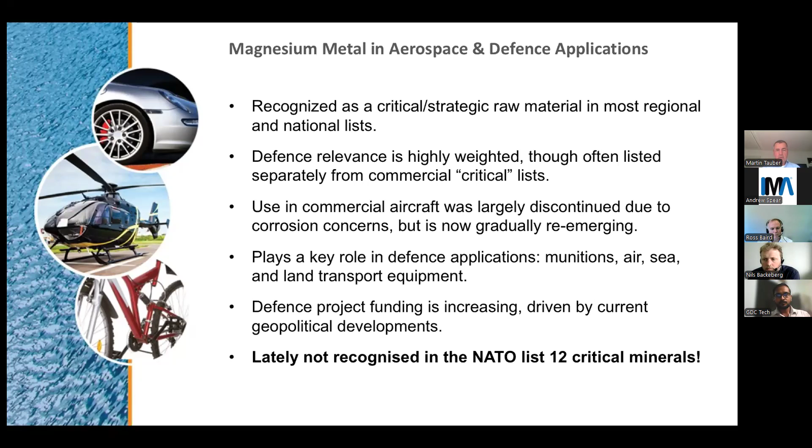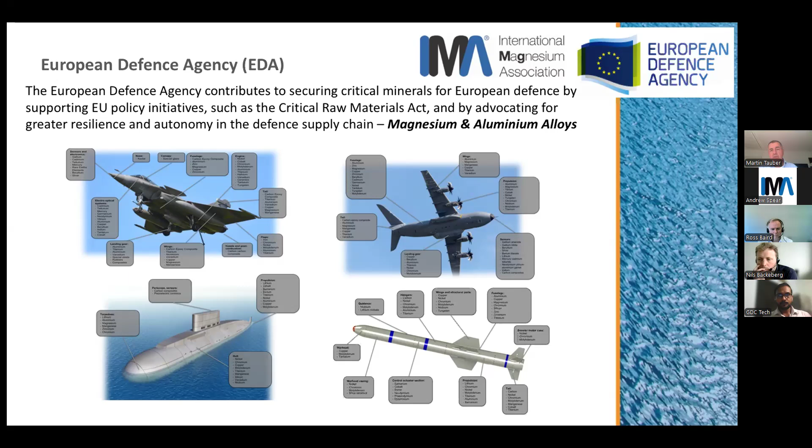Here's some examples, this is from the European Defense Agency report, I think from 2023, in coordination with other European policy initiatives like the Critical Raw Materials Act. As you see with these application examples, it's very hard to see, but I can assure you that magnesium is on all the slides here. And if we talk about magnesium for defense, aluminium alloys are also very heavily used, so it's actually the magnesium and aluminium alloys perspective that's interesting for us.

Some other examples here from an independent company who combines all the different lists and selected a couple of raw materials here. You see in the defense and related applications that magnesium plays a medium role. But interesting, on the right side, possibly also hard to see, is that magnesium, when you look down at the end under defense and other applications, is actually listed in most of the defense applications there. So this confirms it's very heavily used.

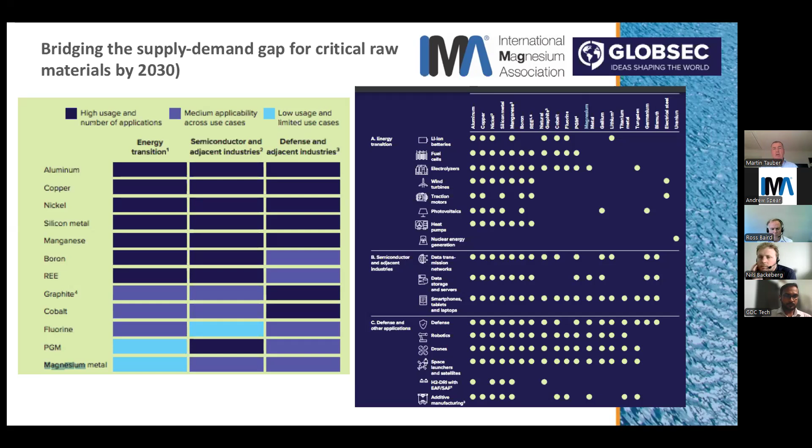An example from the US, I think a recently published list, there are two sides of the lists, one for critical materials for energy and one for critical minerals.

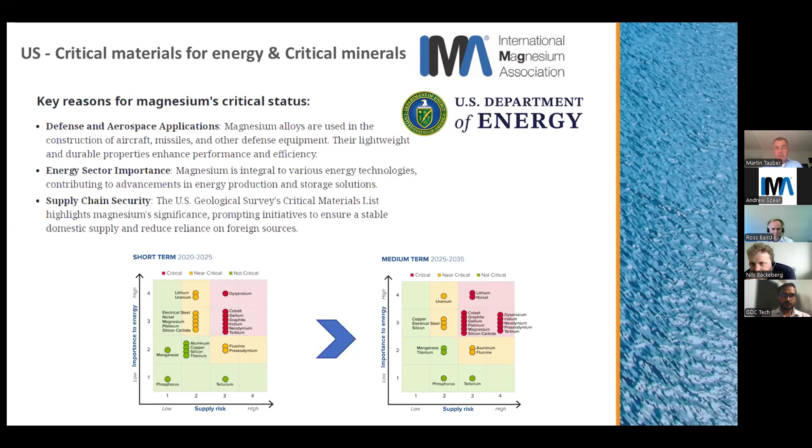The first statement prominently names defense and aerospace applications because of the criticalities involved. At the bottom, you see the different materials in the criticality assessment. In the short term, ending this year, magnesium is marked mid yellow dotted, and in the medium term, the next 10 years, magnesium is listed as red dotted.

That's a critical material. The last one I show is the NATO list, published last year, actually based on studies from the Den Haag Institute. It lists 12 materials critical to military applications. Strangely enough, magnesium is not among these 12 materials, but it's also not on the list of considered materials, which you have on the right side.

So this was very strange to see. I don't know why, but we have asked about that. We've commented on that list on social media as well, without any response so far. We'll continue doing that. We see manganese on that list, and what we've seen in the past is that consultants and policymakers still mix up manganese, magnesium, and magnesite in these critical raw materials assessments.

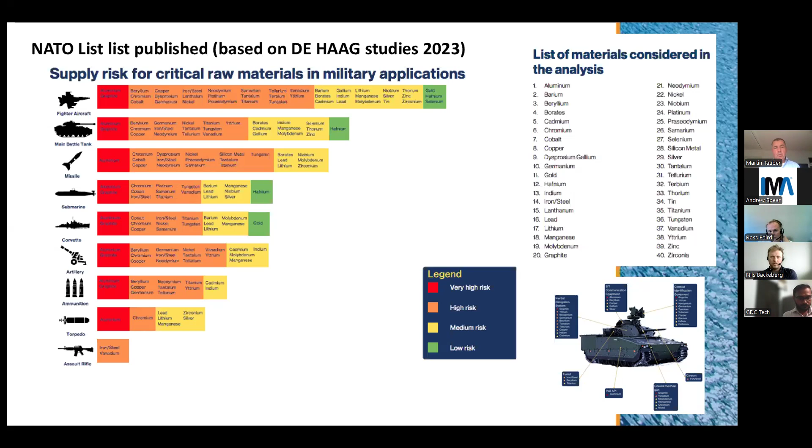So as a closing point, I want to demonstrate what difference it makes whether we are on the list or not. I think IMA's opinion is that we have to encourage our material to be on such lists. This is just an overview of what impact it could have on the market.

NATO, the bloc, has identified 6 areas. First, identify key vulnerabilities to prevent supply disruption risks and declare the material as strategic. Second, strengthen supply chain resilience, with measures including strategic stockpiling, recycling, and substitution.

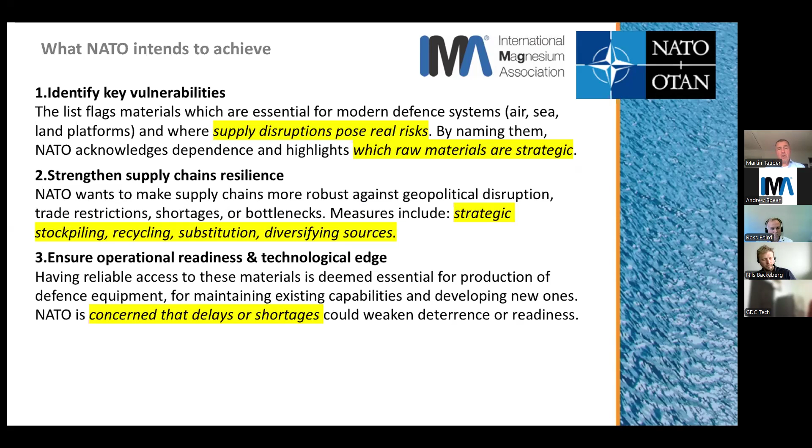I think stockpiling is especially interesting for an industry. Third, ensure operational readiness and technological edge to overcome shortages, which impacts the readiness of the bloc. Fourth, policy cooperation amongst allies, which will span procurement, stockpiling, risk assessment, and possible trade policy.

Fifth, public transparency and signaling, which also mirrors how it will encourage and attract investment into our industry, and guide research, innovation, and substitution. The last one is R&D alternatives, not only into substitution but also into recycling technology. So it's very important to be on such lists, and IMA and its members will encourage and inform policymakers on this as new assessments come up.

So with this input from the policy area, I will hand over to our first speaker, Dr. Nils Backeberg, founder and director of Project Blue. Nils worked before at companies like Roskill and Wood Mackenzie. He has an academic background across 3 different continents: South Africa, Canada, and the UK. He will talk about trends and forecasts in aerospace and defense applications, in particular magnesium.

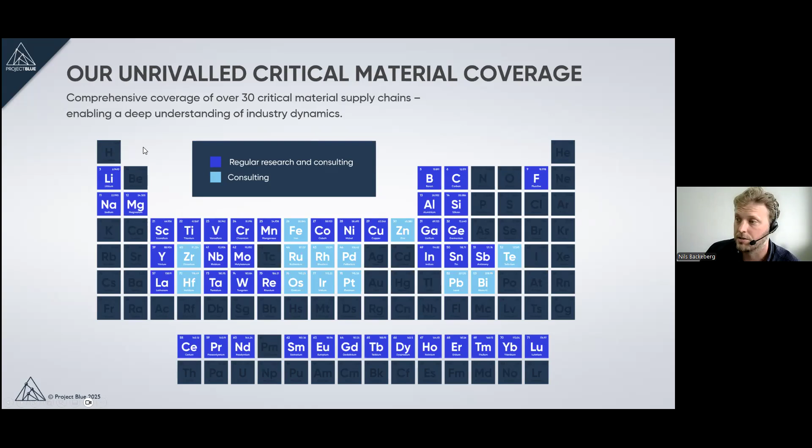As part of that, what we get to do and where we leverage our expertise is identifying cross-cutting themes within the different commodities and their nuances, whether it's lithium-ion batteries or superalloys in general. Because we cover things like titanium and rhenium, where aerospace makes up the large majority of demand, this has led us into building detailed aerospace analysis. So all of our research is underpinned by our own independent research in the different sectors.

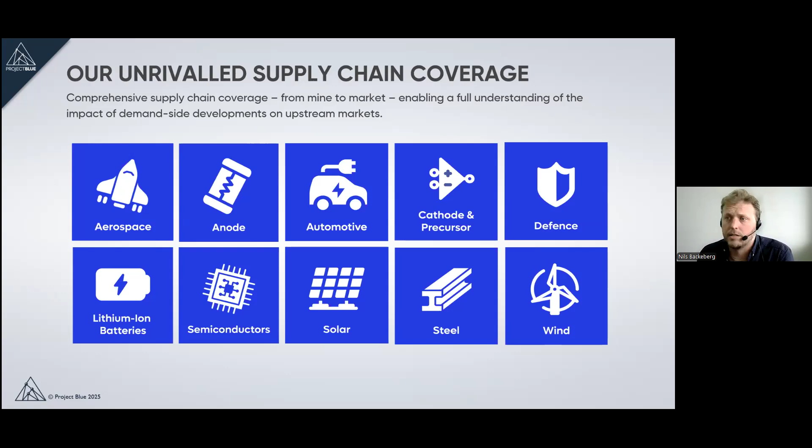We have our views, what underpins the demand drivers, and the supply and demand analysis, price analysis, trade analysis that sits behind each of these commodities.

I won't go into the detail of the magnesium research. My colleagues will be presenting that at the next conference for the association, so hopefully you can get some more information on that.

I'm really going to be focusing in on our aerospace research. There are forward-looking statements, so the usual disclaimer in terms of your due diligence, but I hope you enjoy the narratives that we put together. This is what we do.

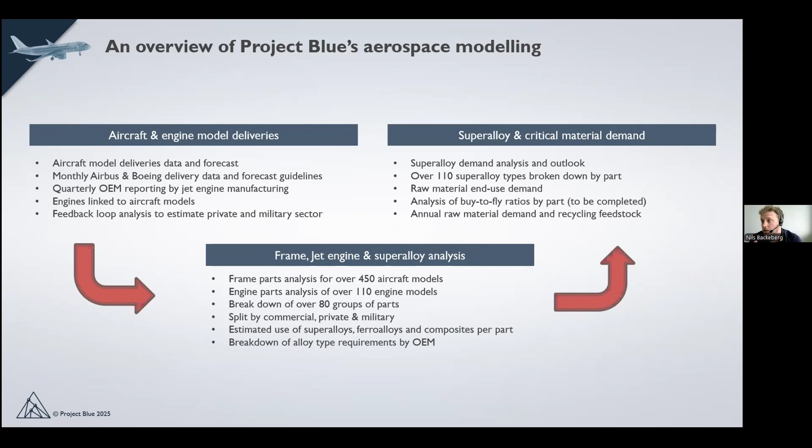So to give you a sense of what we've built, jumping straight in, we've been tracking aircraft deliveries and orders for various commodities. What we've done is forecast out the landscape, specifically post the COVID pandemic and the unfortunate fatal crashes from the Boeing Maxes in 2018, where you saw significant impact to aircraft deliveries, and the demand for these raw materials was impacted.

Trying to understand, when is the aerospace industry recovering? We saw a fast recovery post-COVID, and I'll show you some of the data. But there have been a few things in the pipeline that have impacted the market: disruptions to other supply chains, ongoing issues with certifications, and also the entrance of COMAC out of China. With regards to various supply chains, there are key nuances to dive into.

Now, what we've done in the process, on the bottom side of this slide you're looking at, we've taken over 450 aircraft models and split them out into their different parts and assigned superalloy formulations to the different parts and applications across these aircraft. We've done the same for engine parts for over 110 engines, and broken down the parts into the details, and again we've got all the superalloy analysis in there.

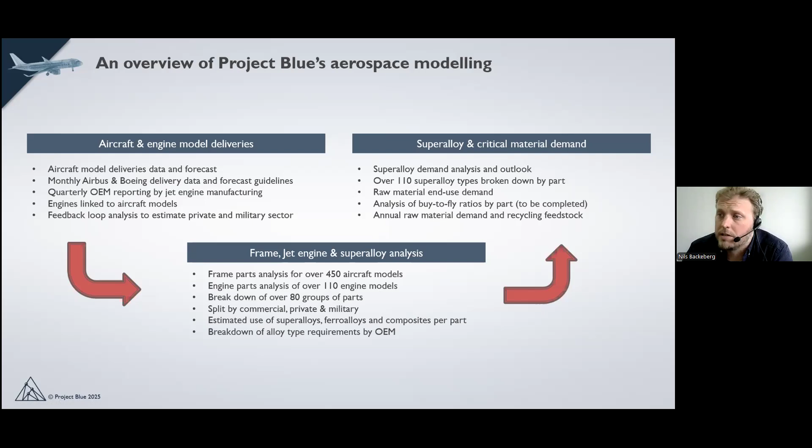And what's quite interesting from the superalloy perspective is the aerospace industry itself accounts for around 50% of the superalloy market. We're busy finishing off industrial gas turbine research, which will give us the next 25% of that market. So we're doing some really niche and nuanced research to understand the superalloys industry, which has been a lot of fun. So I hope you enjoy what we've put together.

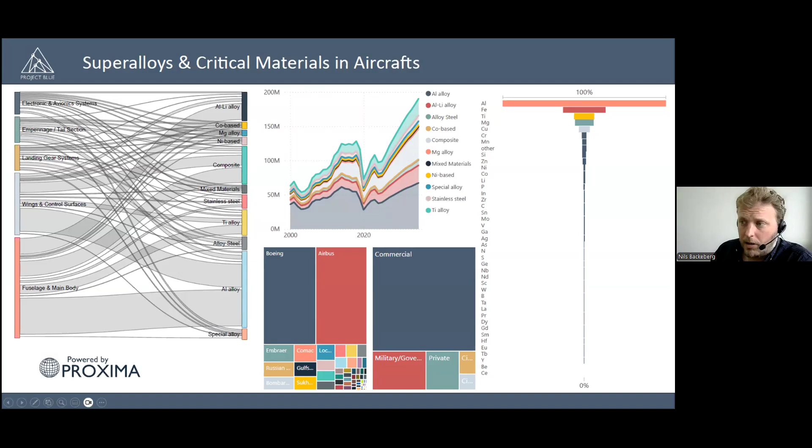So this is effectively the output at the end. This is a snapshot of a Power BI dashboard. I do have it open live here, where you can start to identify, if we look at Boeing, what alloys are they using, Airbus, what alloys are they using, and even Embraer, and try to understand what commodities go into the different parts of the aircraft. It's a live dashboard, so I'm just showing you a snapshot here.

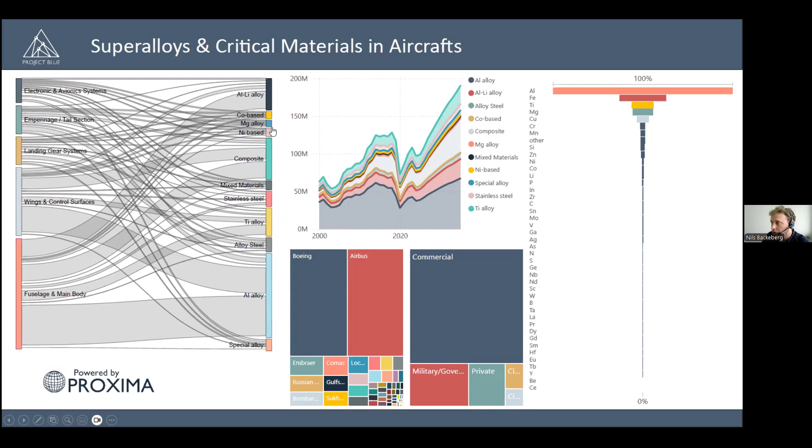And you can see the aluminium alloys. This is looking at frames. Ah, there we go. So this is looking at aircraft frames. You can see aluminium alloy is exceptionally important. This is really where you see titanium alloys, magnesium alloys sitting in here as well — here they are in the small blue at the top. This is in terms of total volumes of the aircraft weight.

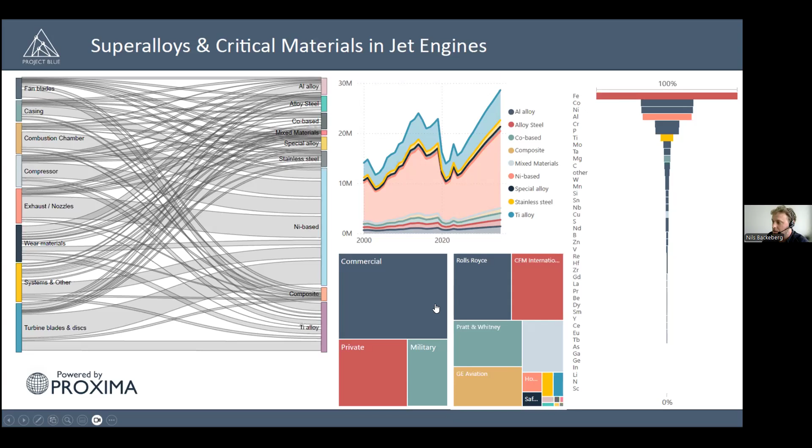Doing the same for engines looks slightly different — lots more centered around nickel-based alloys and special alloys going into the engine and its different parts. And again, breaking this down by Rolls-Royce, Pratt & Whitney, etc., all the key OEMs. You can see how commercial really defines the overall pattern of demand in the aerospace industry, but military for engines makes up a significant portion.

Going back one slide, slightly less on the frame side — that's just the relative proportion of materials used for the frame versus engine when it comes to a fighter jet. On the right-hand side, you can see aluminium is a high volume material, and iron, titanium, magnesium is the fourth largest element used in the alloys in an aircraft frame. So a very, very important metal when it comes to the aerospace industry.

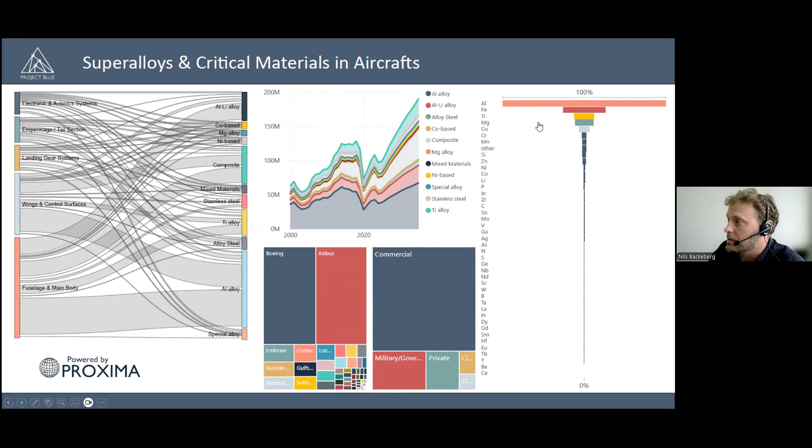For engines, it falls slightly lower, but still in the top 10 of commodities used by volume in engines.

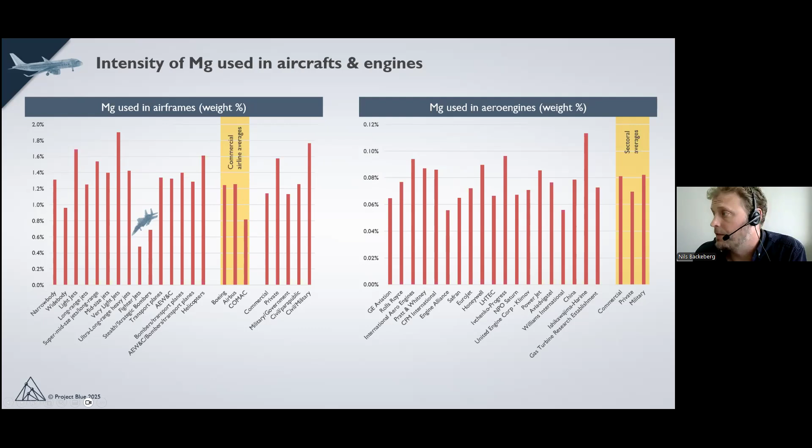I'll come back to that. So we can break this down a little further. I mentioned the disruptions to the aerospace industry post-2018 and into the COVID-19 pandemic year in 2020, with quite a rapid recovery in 2022 and 23, as everyone was eager to travel again. But we've seen real disruption to supply chains over the last 2 years, with the aerospace industry struggling to recover to its delivery rates prior to the pandemic. So there are ongoing issues there.

You can see here where we break this down by the different OEMs—Airbus and Boeing at the bottom, other commercial next. This is really where we see some penetration from COMAC ramping up. Military is shown in yellow, private planes are also significant, and helicopters also play a good role. So what are the parts in the airframes that sit behind this?

Yes, it's the fuselage and main body, wings and control surfaces. Just to note, this is in kilotons of magnesium element or metal, and this is cumulative data from 2015 to 2035. There are a few nuances here in terms of developments in the alloys and so on. But you can see the most prominent use and demand is magnesium used within an aluminium alloy. You can see aluminium lithium alloys coming through, aluminium scandium also used, and then magnesium alloys as well.

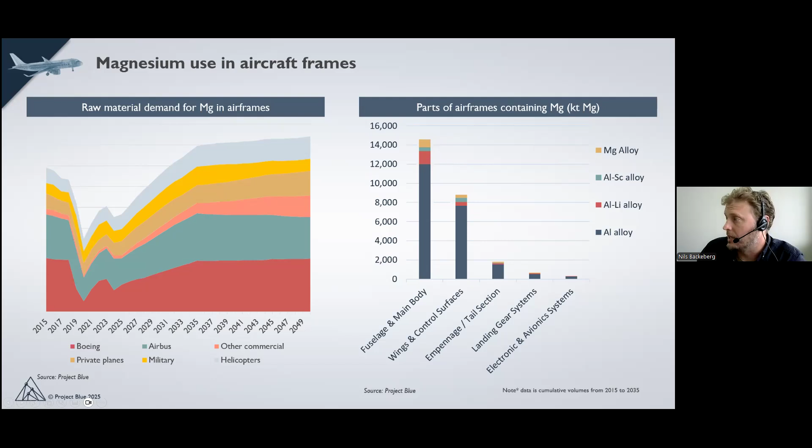What we can do with this data is try to pull out these nuances I keep referencing, because for every commodity we look at, there's a different story. I mentioned we've done this for tantalum and niobium in a previous conversation with the organizers, trying to find different nuances there.

Titanium we're showing over here—a high use of titanium in military as an intensity of use in aircraft, and really magnesium sitting in here. What this is really showing is that you have titanium, vanadium, aluminium alloys replacing other aluminium alloys in certain applications, specifically high performance. So this doesn't necessarily indicate low demand, it's just the units consumption shown here.

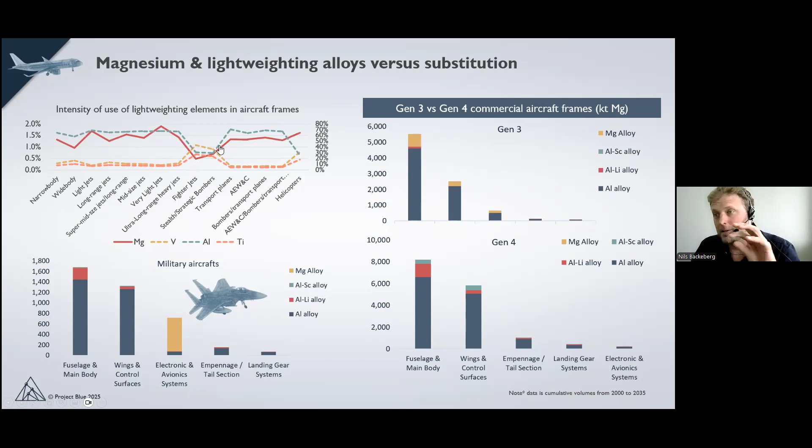Again, what we get to pull apart here is average narrow body, average wide body across all of the data we have. But if you break it up between a third generation aircraft versus a fourth generation aircraft, you can start to see changes and evolutions in the alloying materials.

So aluminium alloys dominate magnesium usage in aerospace—these are frames containing magnesium throughout the entire aircraft: fuselage, wings, empennage, landing gear, control surfaces, etc. Aluminium lithium alloys are used more selectively but concentrated in the main body of the aircraft. Aluminium scandium alloys remain rarely applied, but where used, they reinforce the supporting structures. I'm sure we'll hear more about that from our other speakers coming up.

Magnesium alloys were historically applied more broadly in airframes, notably in avionics and cockpits, control surfaces, doors, tail sections, etc. Their use has declined sharply due to flammability and corrosion risks. But even though there's been a change in the alloy makeup, demand for Gen 3 over the whole period—about 5 million tons, if I have the number right—has increased here to 8. So it's not necessarily causing a decline in demand overall, but there is a change in the intensity of use.

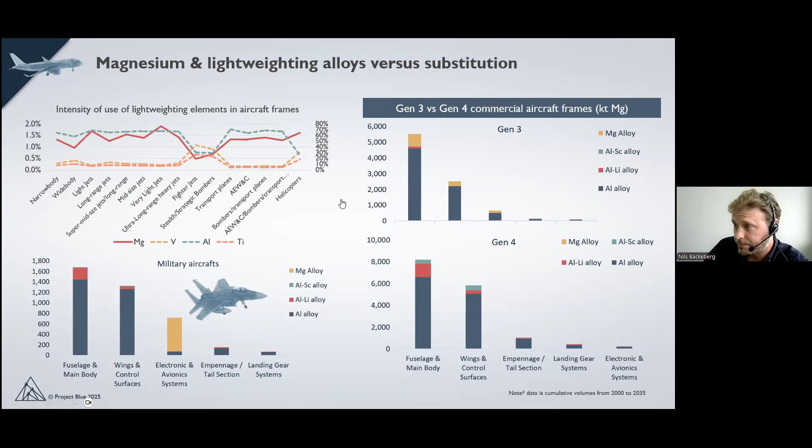We can see this demand running forward, and I'll show you what the forecast demands look like. In military applications, we see a very similar breakdown, but electronics and avionics systems use more of the magnesium alloys, with slightly different breakdowns compared to commercial applications. This has to do with the performance of the alloys necessary to operate at higher temperatures and pressures in one application versus the other. So we're trying to pull out the key narratives for all of the commodities through here.

For jet engines, same story, just different data sets. Much smaller volumes in engines, but gearboxes and accessories are really the standout parts for jet engines that use magnesium in its various alloys.

And you can see here the different OEMs. So this helps you know who you should be knocking on, whose doors you should be talking to about the criticality of magnesium for their supply chain. How exposed are the different OEMs to the use of magnesium in their alloys, in their products?

That's a good point for me to quickly comment on something you said earlier, Martin, about why these commodities aren't necessarily finding their way onto criticality lists. In many cases, depending on who you talk to down the value chain, some end consumers who purchase the alloys are unfamiliar with where that material is coming from, or even what elements are inside their products.

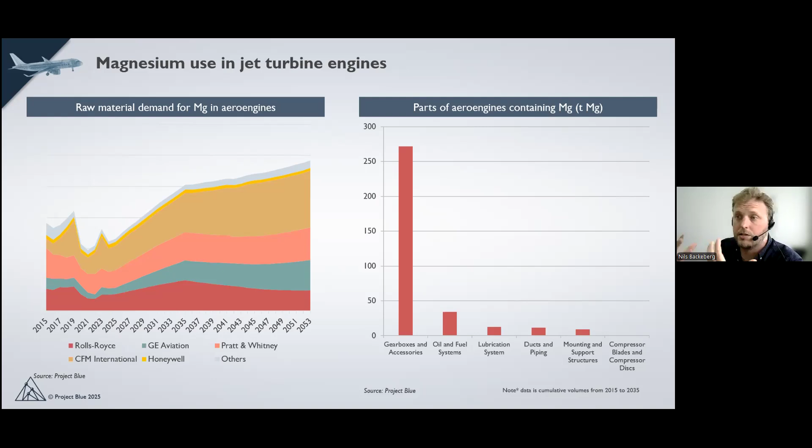We had certain people in Europe mention to us that gallium is not critical to their value chain because they purchase their products all in Europe. But the traders in the room who sell to them indicated, just FYI, we buy all of our gallium from China, so it should be critical. So it really is a perspective thing, and the education of understanding the supply chain is exceptionally important to understand all of this.

So what can we do with the data? That's sort of the breakdown of magnesium use in aircrafts and engines.

Just to show you where we see this market going: Boeing and Airbus, this duopoly that's evolved over the last two decades. We're still coming out of the disruptions from the COVID-19 pandemic and supply chain concerns across various parts of the aerospace industry, so we see a steady recovery. We only expect deliveries to go back to record levels in the late 2020s into the 2030s.

But at the same time, we're all starting to travel quite normally again, and we're back to record levels now already, indicating that maintenance requirements are actually being strained a lot more than new deliveries at this point for the aerospace industry. So demand from a maintenance perspective is back to where it was and even going beyond that.

And the same comes from the engines delivery outlook, looking at the same data. A key thing to understand is the steady incremental encroachment from COMAC, the Chinese manufacturer. They've invested heavily in building out the aerospace industry right now, though they don't yet have their own engine program—it's in development, with various conversations about when that's expected to come online.

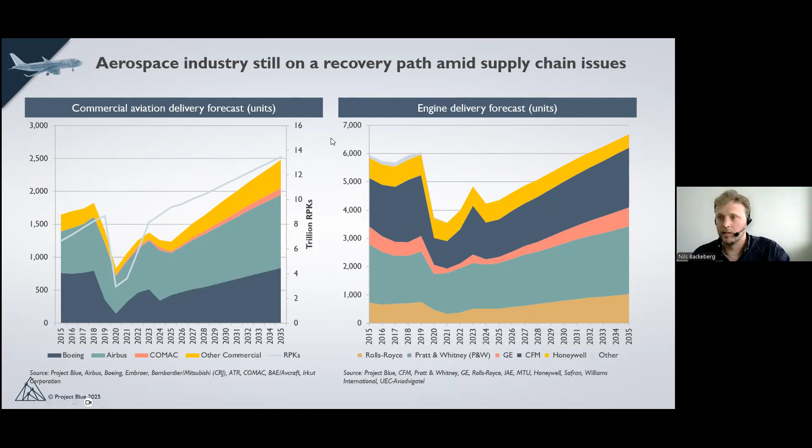But this will really start to shift supply chains depending on where aerospace grade materials and super alloys are produced and what that supply chain looks like. Titanium is an interesting one to get into with the Russia-Ukraine conflict, but that's not one to go into on this call. Right, what does it look like for magnesium end-use demand?

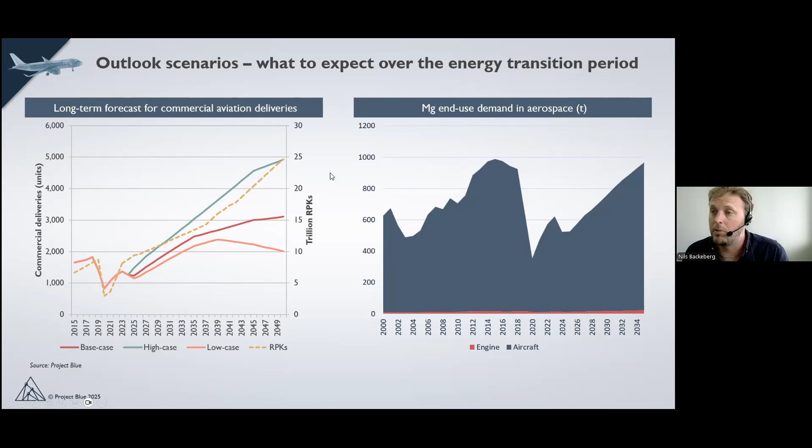So just to put this into context and finalize, why is magnesium critical in this aspect when you're looking at the duopoly of Airbus and Boeing? A lot of the magnesium metal exports and production is sitting in China.

We'll present more of this at the upcoming conference, so I'll jump through this quickly. But really what we're seeing is that despite high prices, the imports of materials from China aren't impacted. They are crucial for the development of different products, but fundamentally the market is driven by developments in China. You saw the energy crisis in China impacting the global availability and pricing for magnesium.

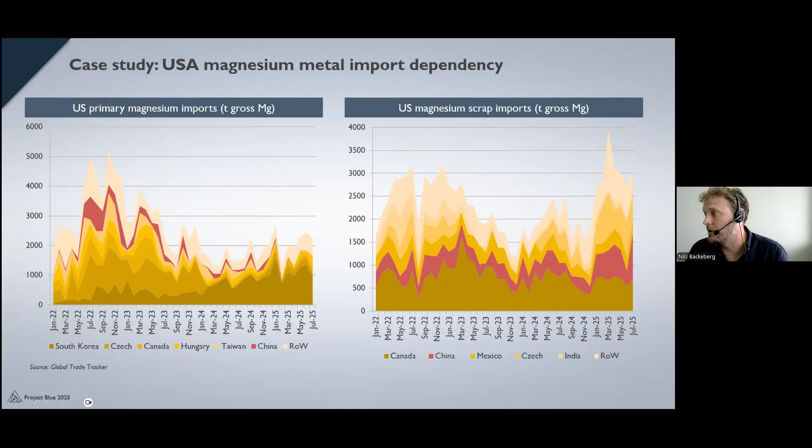Just looking at the USA and its dependency on imports, there are large efforts on diversification, but there's still requirements from China and other areas for imports. Domestic feedstock availability is not able to substitute, and you can see scrap imports ramping up over 2025 already into the USA.

It will be dependent on all the different applications in aerospace. In terms of total volume, this is not the largest application for magnesium, but it is one that's growing significantly, around 6% CAGR. And specifically within the geopolitical context, the developments of the duopoly and the arrival of COMAC, there are changes coming in the supply chain that will impact all of these superalloys.

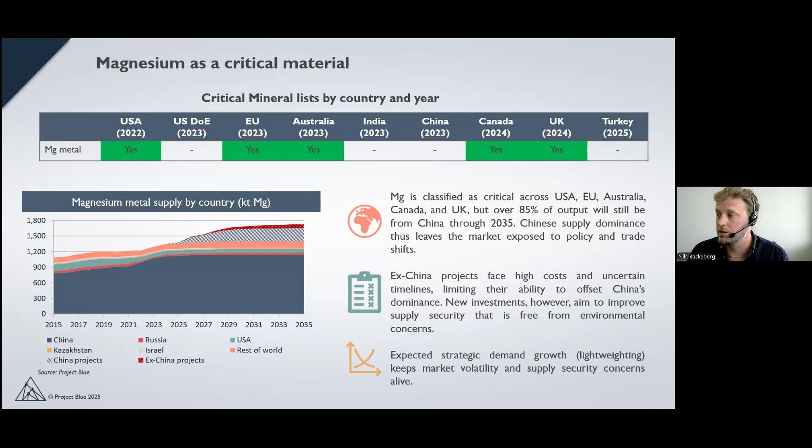Right, Martin, I will end it there and then hand over to questions now or later. I'll let you manage that. Thank you very much.

Thank you, Nils. I probably have some comments about your market figures. The estimate for 2025 is a little bit too pessimistic for me. Following the second quarter already, it will be a little bit more than what's showing there, but you will certainly update this, I'm sure.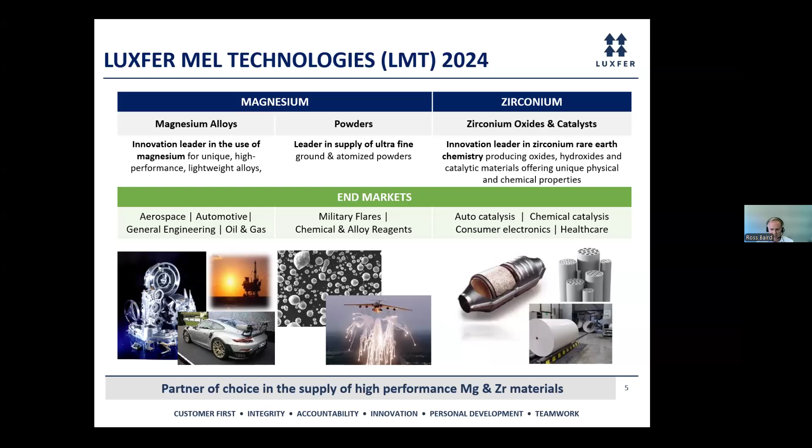Magnesium alloys, we have applications predominantly in aerospace, but we also deal in luxury automotive, have some general engineering applications, as well as applications in the oil and gas industry. So quite a diverse range of applications for us there.

So today, getting into the detail of what I'm here for, the aerospace and defense applications. Just quickly for anybody joining who isn't familiar with magnesium, the first question is why do we even want to use it in aerospace? Well, the simple answer is its weight. Magnesium is two-thirds the weight of aluminium and significantly lighter than titanium and steel. So therefore, there is a real drive to enable the use of it in anything that can benefit from being lightweight.

It is easily formed through casting, and then you can easily machine it, possibly dry. We do that here in Manchester, and that means we can recycle it very easily. Machining magnesium uses less power and can be done quicker as well. It can be welded, and then Martin alluded to comments about corrosion causing issues in the 1970s. Well, there's a new suite of alloys that have been around for several years now but are gaining more and more popularity, and they are addressing the corrosion issues and also high temperature performance. I'll go into a bit about that later. And then finally, it is an abundant element, so it's easily sourced, even though at the moment the majority of it is processed through China. It's actually able to be found in almost all parts of the world.

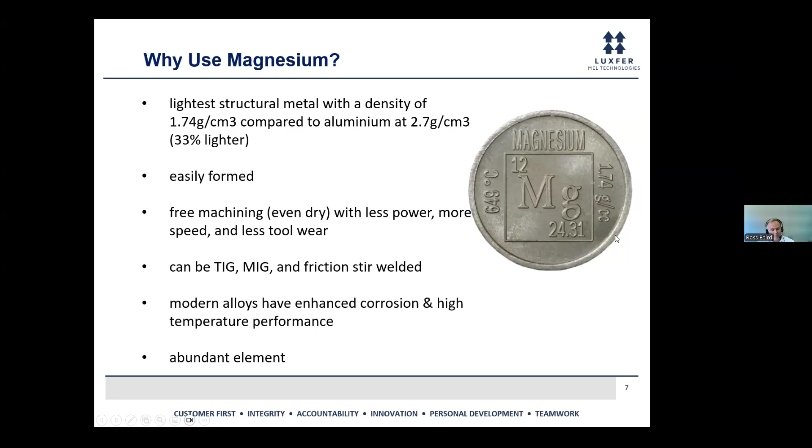So I've explained why we want to use magnesium. Where is it used? Aerospace is a very popular area for magnesium. I should clarify, based on what Nils had to say, I'm only talking about magnesium alloys specifically, not magnesium being part of another alloy.

Magnesium, or magnesium alloys, have played a key role in aerospace applications for over 70 years. As Martin just commented, Luxfer MEL Technologies are celebrating our 90th anniversary this year. The real reason magnesium has had such traction is its lightweight properties and high strength to weight ratio, which has meant it's found uses in engine covers, transmission housings, electronic housings, flight control systems, and aircraft wheels.

This has been very popular within fixed wing aircraft, such as the fighter jet shown on the right-hand side, and also with rotorcraft, such as the helicopters shown. So pretty much almost all military helicopters will have some magnesium alloys on them in some form, as they use the lightweight benefits of it.

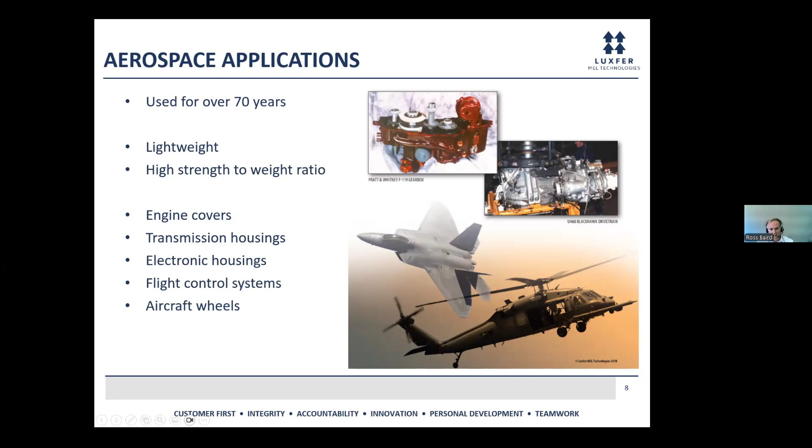If we look beyond aerospace to other defense applications, you've got land-based applications whereby soldiers are being required to carry more and more equipment, and if they're carrying this for extended periods, every gram counts. You can see images of typical applications now exploiting the use of magnesium, again using the lightweight side of it. The durability compared to alternative materials provides benefit for man-portable devices.

But we're also seeing a benefit of the thermal conductivity or thermal properties of magnesium. So it's being used in electronic devices, power systems, and batteries for the housings that those are contained in.

There was a question in the chat asking whether these gearboxes and devices are made from sand castings, investment castings, or all of the above. The simple answer is yes and more - I'll go into more detail later, but a lot of aerospace castings, and I think our presenter in a moment will go into more detail, the majority of aerospace castings are sand castings. There is a small amount of investment casting in the supply chain - I see an opportunity there to grow that area. And then there's also the option to machine them from solid, which I'll talk about later.

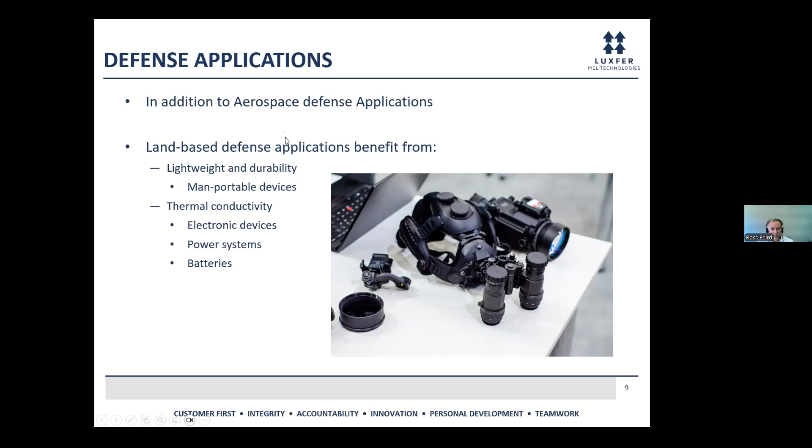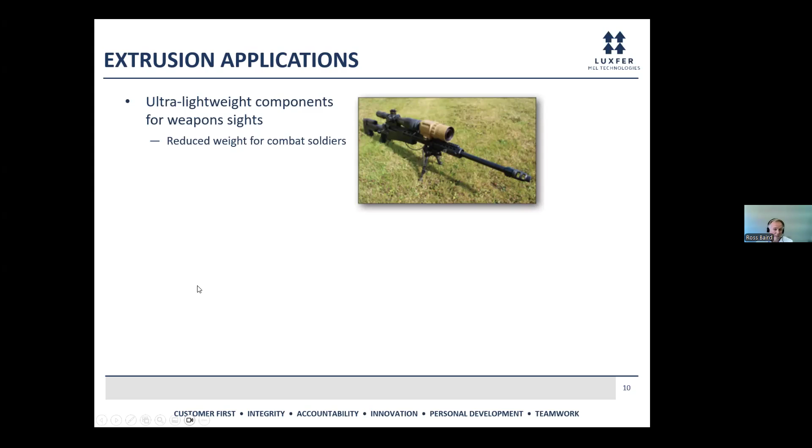One area we can use is extrusions to machine materials from, again applications in defense where you have military sights exploiting the lightweight nature and durability, and also auxiliary components associated with aircraft, namely pilot helmets. They're undergoing a lot of forces when flying, and anything you can do to reduce the weight of the helmet, and therefore the forces on the pilot's head, is very much welcome. So in this example, connectors between the helmet and visors are produced from magnesium alloys.

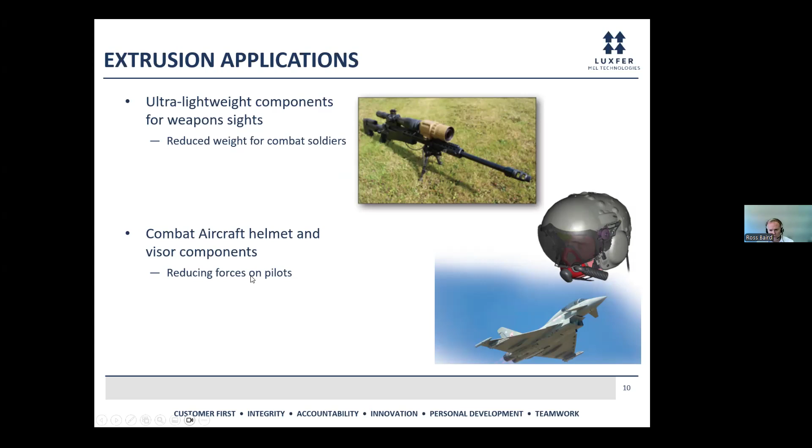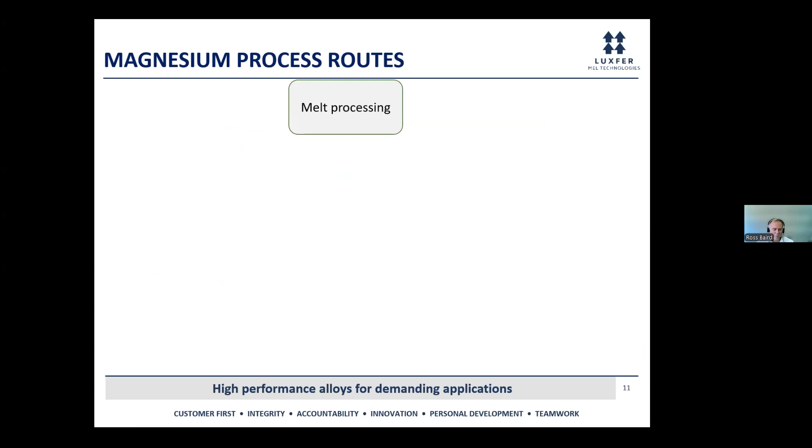So I mentioned and was addressing the question of how these are made. There's essentially three routes. Here at Luxfer MEL Technologies in Manchester, we produce the material - we melt down the pure raw materials and alloy up the material. We produce casting ingot that can go to various customers, who can then sand cast or investment cast a final product, as shown in the example images.

We also produce what's termed direct chill cast slab and billet - large solid pieces of magnesium alloys that can then be machined into required components. Or we can take the slab and roll it, producing a plate or rolled sheet with different or enhanced properties for various applications. Or we can take the billet and forge or extrude it, then machine those materials into the final components.

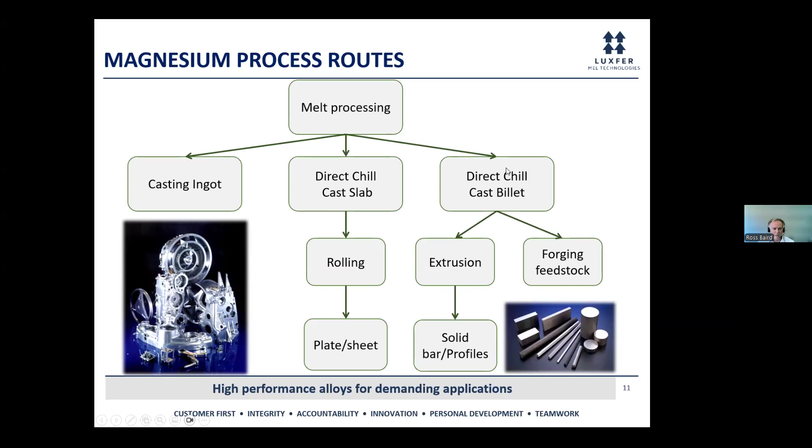If we consider the sandcasting process, the traditional aerospace alloys include RZ5, ZE41, WE43, and QE22. The standard aluminium alloys are A356 and C355. We now have an alloy called Elektron 21, which addresses high temperature performance.

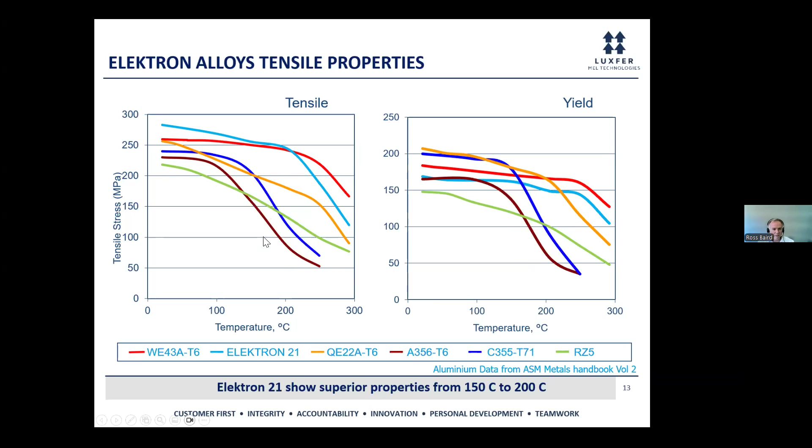What you'll see from these graphs is that A356 and C355, whilst comparable at room temperature, once we get up to 150 to 200 degrees Celsius, the properties drop off. If I move to a simpler version of this graph, you'll see that above 150 to 200 degrees Celsius, we now have a magnesium alloy that outperforms the standard aluminium sandcast alloy seen in a lot of aerospace components. That's really the sweet spot for applications at about 150 to 200 degrees Celsius.

And there's a similar, not as distinct, but similar situation with the yield properties as well for the alloy.

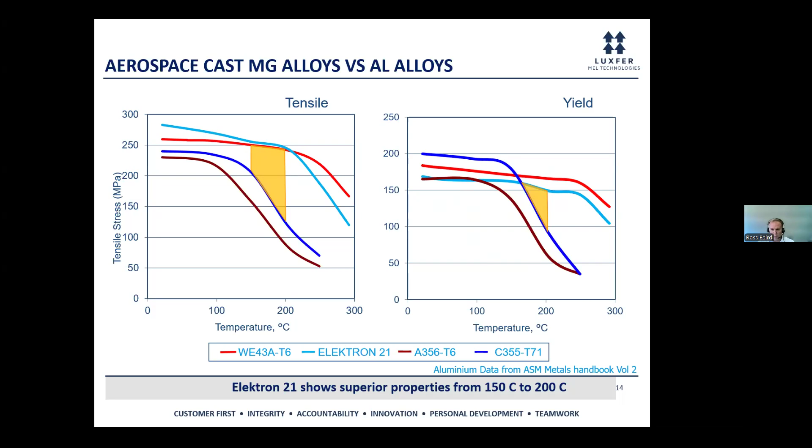Martin alluded to concerns with regard to corrosion, and we have had that for the original magnesium aluminium alloys, and even ZE41, a zinc rare earth magnesium alloy, with concerns over corrosion. But actually we've seen in recent years with WE43 and Elektron 21 corrosion performance approaching that of aluminium alloys. You'll see in the image on the left, pitting after 10 days in a salt fog test in the RZ5 ZE41 material, and no such impact on the Elektron 21 material.

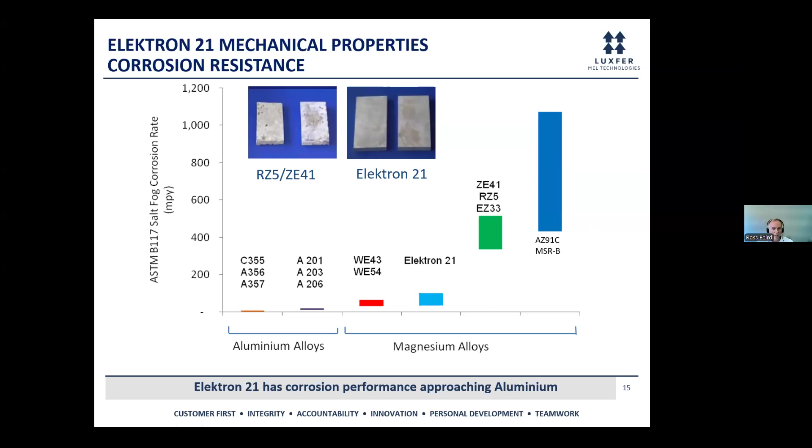Especially with the correct coating systems, end users are seeing a really significant step change in performance - much better life cycle cost and life cycle performance on their components, and therefore they're looking to choose some of these more recently developed alloys.

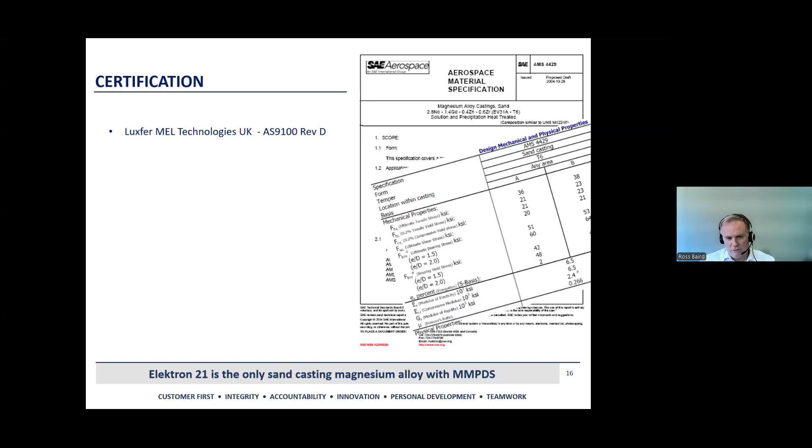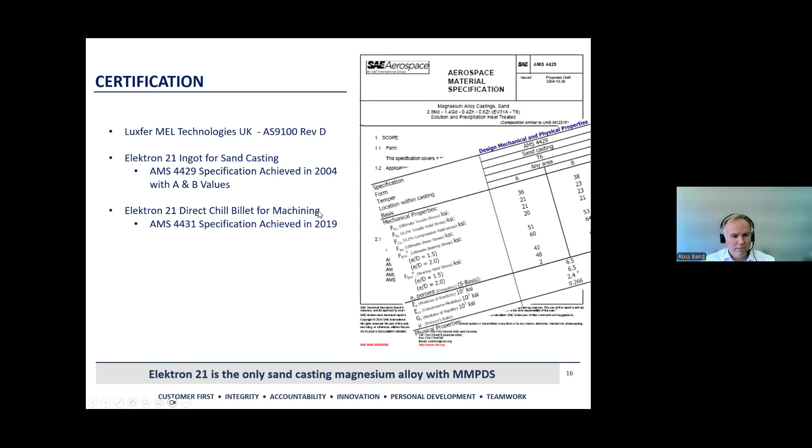The other thing assisting designers is certification. Luxfer MEL Technologies have AS9100, but more importantly, Elektron 21 for sandcasting established an AMS specification in 2004, and it was the first alloy to have full A and B data, which is key for designers considering material choices. We followed this up in 2019, achieving an AMS specification for the direct chill billet and slab. In between, we also established Elektron 43, an extrusion alloy, which has its own AMS specification and an entry in the MMPDS.

So that's enabling end users, such as some of the names listed by Nils earlier, to consider magnesium, because the biggest challenge we've seen for years is that people don't know what they can do and what options there are.

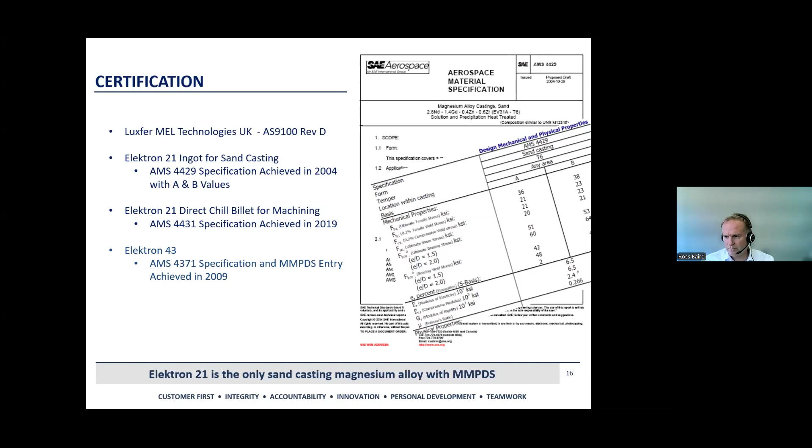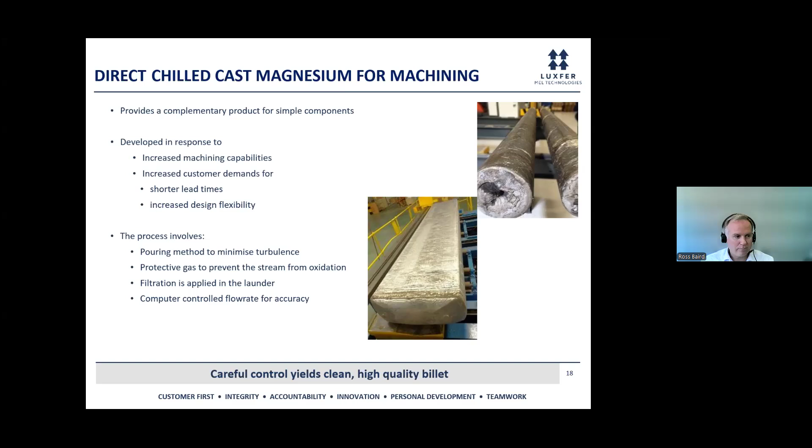We went through rigorous testing to validate that this material would match or exceed the properties of the sandcasting alloy. So we can provide that with confidence to customers, giving them extra options and confidence in quality and lead time. We have one customer we converted from sandcasting to this due to urgency with a component, and to this day we've provided over 1,500 parts to them without them returning a single piece.

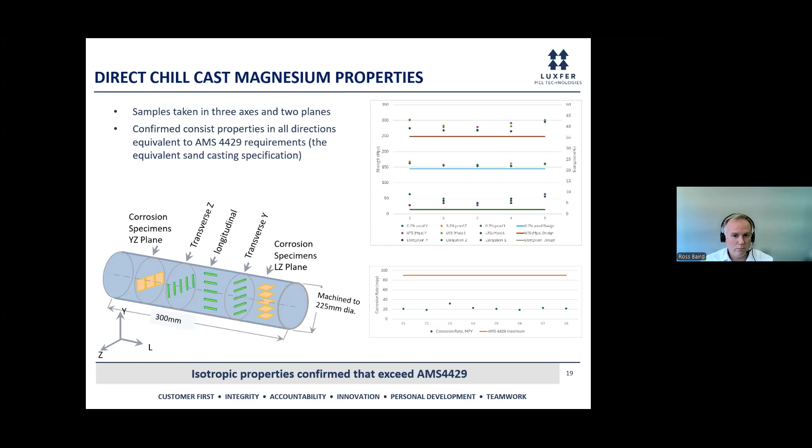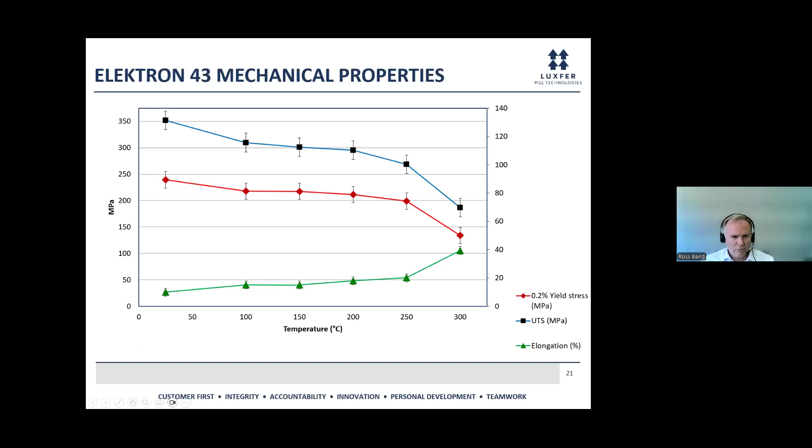I'll now move on to discussing the extrusion route, another alternative option. It provides slightly higher properties, retaining good properties up to 250 degrees Celsius, which provides the option for people to specify higher temperature areas or higher strength requirements. You also have the opportunity to extrude near-net shapes and detailed profiles if required. Magnesium is harder to extrude than alloys like aluminium - it takes a longer process, but it is possible to achieve. From there, we machine them into the final finished shapes customers require.

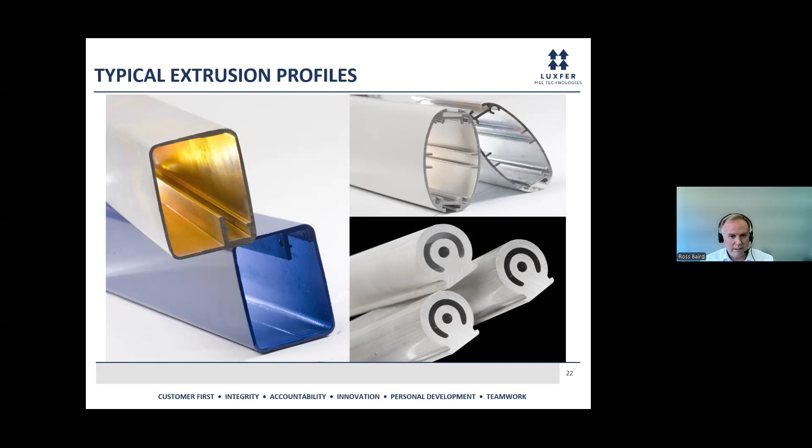That leads me to the final thing I wanted to talk about - what is stopping magnesium being used more widely in aerospace and defense. We believe a large part of that is down to the supply chain. We're spending a lot of time speaking with end users - they're very keen and interested to use the alloys, however they do not know how they can use them. Their supply chain is not geared up to use magnesium. So we've been doing a lot of educating of end users and the supply chain on how they can use and handle magnesium. We're also looking at how we can nurse and assist people through that whole process and provide finished parts.

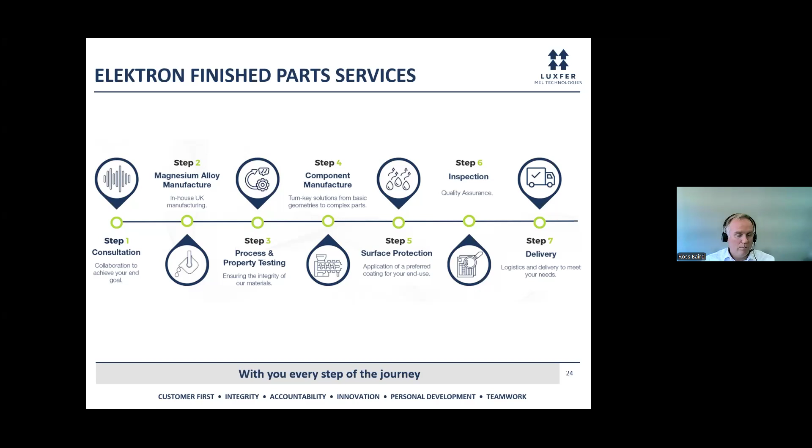So each step is talking about working with the end users, how they can understand the alloy, because quite simply there isn't the knowledge within a lot of end users. So we as an industry need to educate those, and webinars like this are wonderful for that. And then we can take through the alloy manufacture, going through the steps of machining, applying surface protection, and finally delivering the final part.

On the topic of machining, machining magnesium can be carried out dry. That's certainly what we do here at Luxfer MEL Technologies. We can then recycle the material very easily. It is possible to recycle magnesium that has been machined with a lubricant, but it's much more difficult. The key thing with machining magnesium is that it can be quicker and use less energy than alternatives.

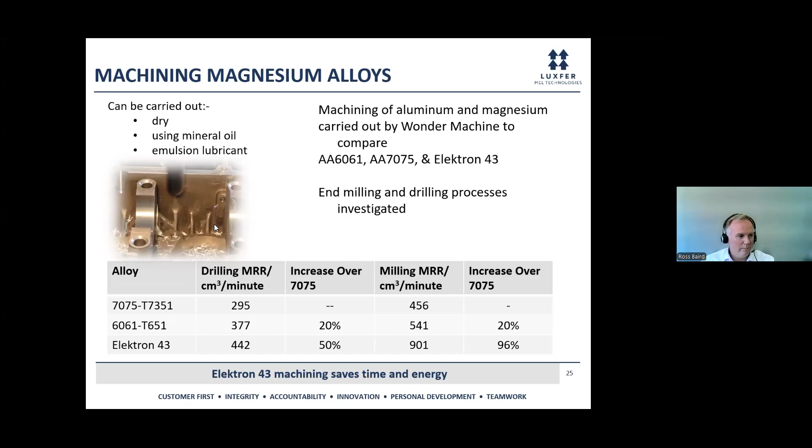There's some figures at the bottom of this slide showing the difference in speeds of machining magnesium compared to popular aluminium grades, and a further summary of that. It can be much quicker. The only thing is, as it says there, you can machine it dry - you just need to keep your housekeeping, keeping clear of the area, clear of waste, swarf, etc.

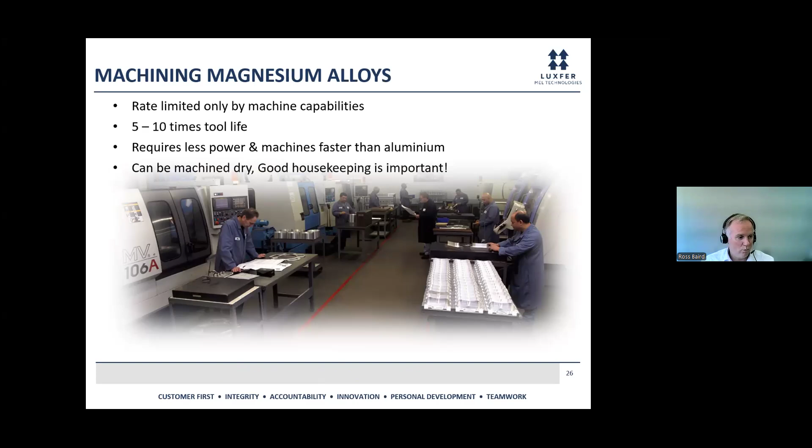So just quickly, magnesium has been around for a long time. It's not particularly new in aerospace. There are many applications exploiting it. I will take the opportunity - there was the question about drones.

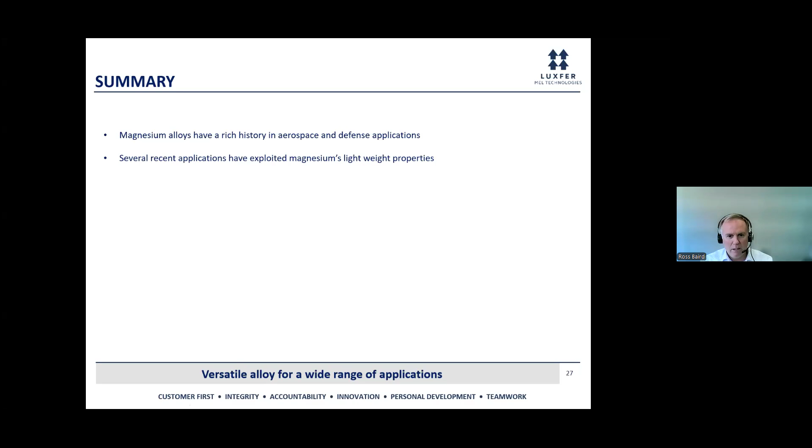It really depends on size. Martin commented that he was at a drone event where he didn't see much, people didn't know much of it. I don't know, but certainly when we've spoken to people, with small drones you're generally struggling to see where the benefits are. But drones can range from one that can be carried in your hand through to one that is basically the size of a small aircraft.

As you get up to those sizes, there's absolutely applications for magnesium in there. Depending on what's driving the drone - if you're talking about batteries, for an electrified drone you're talking about additional weight, where magnesium alloys are being used to reduce weight to compensate for that. If you go through to the very large drones, these are being driven with the same engines as you'd see in a standard fixed wing aircraft, and so those have exactly the same applications and requirements for magnesium alloys.

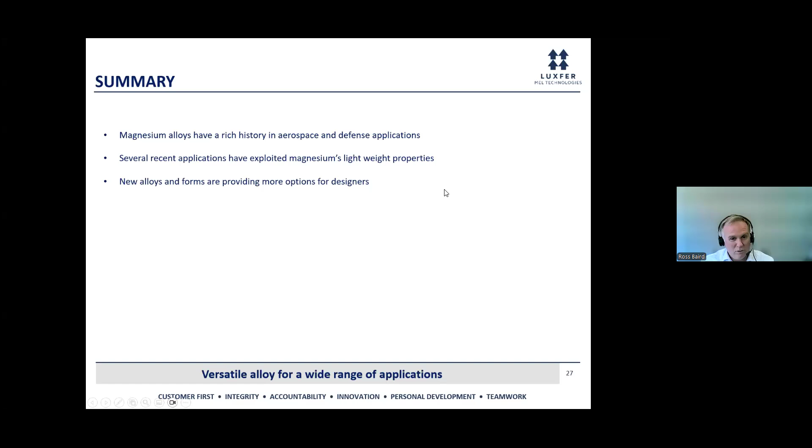So yes, there's opportunities there with drones. It's usually the larger drones, and also applications where, should the drone want to be flying for longer hours, every kilo of weight saving can mean extending the range and time that can be in the air. So there are lots of opportunities for people to exploit the benefits and lightweight properties of magnesium alloys.

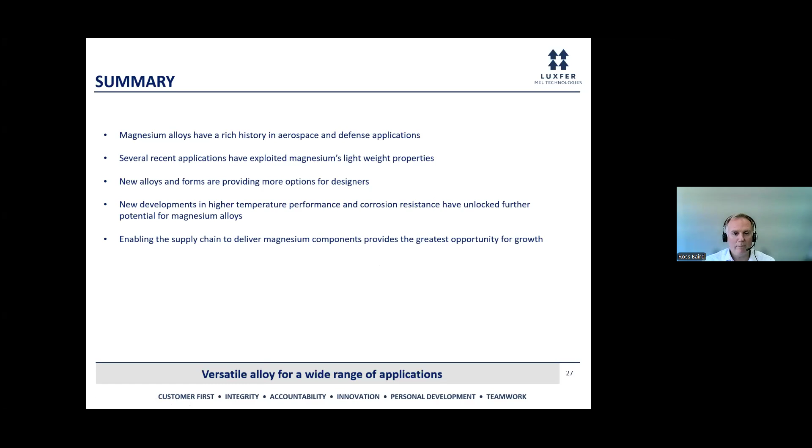I've talked a little bit about the newer alloys that are providing some more options, and the corrosion resistance. Really, we do need to look at enabling the supply chain and working to make sure that when people want to use magnesium, they know how to get it. And yeah, I've just commented on the drones as well. With that, I'll open up to see if there's any questions in the chat or any comments from Martin.

Thank you, Ross. Very interesting, and I'm glad that you saw more magnesium in drones than I saw - probably I saw the wrong drones, the small ones. But we saw very small drones out of Thixomolding magnesium as well in the past. So it's out there, and as you said, as they are reaching the size of a small aircraft, it's the similar lightweight issue which counts, and magnesium has certainly an advantage in that.

If we have time, Ross, you could look into the questions - some are directly related to the operation of Luxfer. Oh, okay, yes. So one question was - sorry, I was just scrolling down.

So there's a question here: how do I see magnesium alloys being utilized in EV air mobility? Absolutely, it really comes down to lightweight - that's the benefit there. Generally speaking, you're not talking about too much with temperature, to my knowledge. So you're really more looking at the lightweight nature, the corrosion resistance, and the mechanical properties that you need to achieve. But absolutely, magnesium can play a role in eVTOLs, and there is interest definitely around the world for that.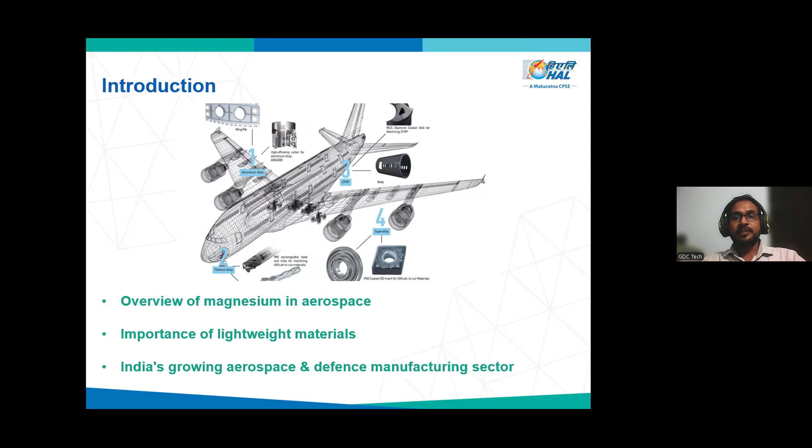Magnesium is seen as a key material in aerospace manufacturing because of its ability to reduce weight while maintaining strength. In aerospace, every gram counts. Lighter components mean better fuel efficiency, improved payload, and extended aircraft life. India's aerospace and defense manufacturing sector is expanding rapidly with ambitious projects like Light Combat Aircraft, ALH, and various other defense applications. There is growing interest in materials like magnesium to meet future demand.

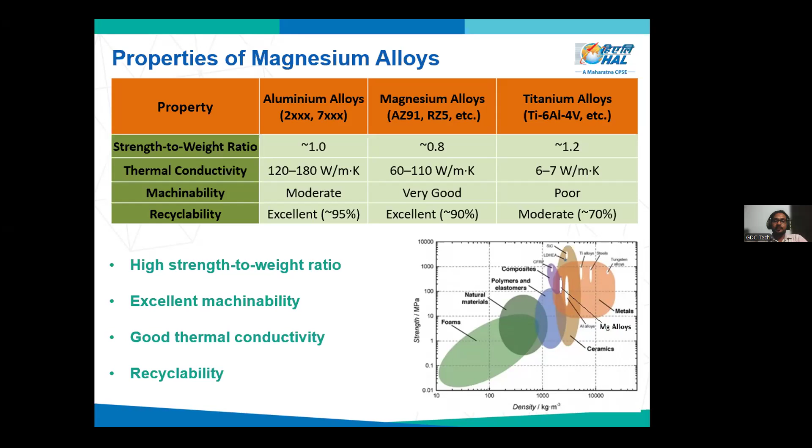magnesium alloys have good thermal conductivity, which helps in heat dissipation from critical components like engine housings or gearboxes. And lastly, magnesium is recyclable, which supports sustainability and reduces material costs over the long term.

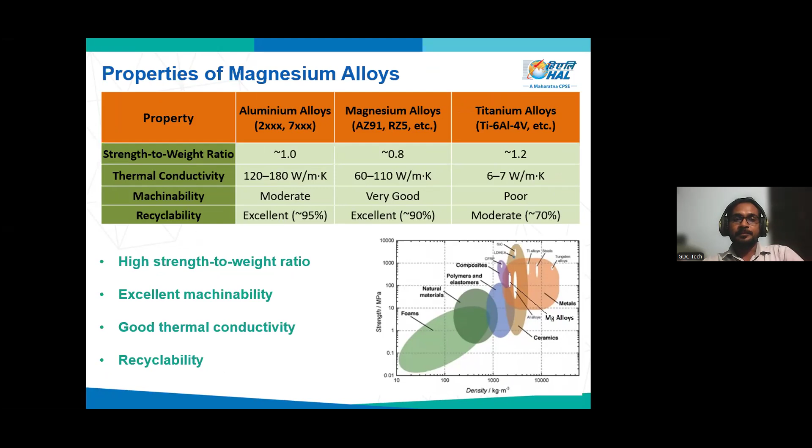Now, global leading aerospace companies like Airbus have already integrated magnesium castings into their designs. For example, Boeing uses magnesium for gearbox housings in some aircraft, because it reduces weight without sacrificing strength or performance. Similarly, structural housing and mounting brackets made of magnesium are widely found in helicopters, drones, and even missile systems.

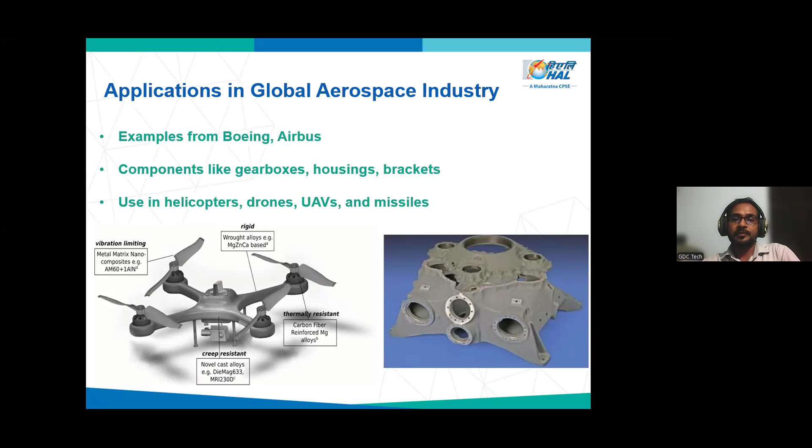Coming to the current status in the Indian aerospace sector. In India, efforts are already underway. Foundry and Forge Division of HAL and Defense Research Development Organization (DRDO) are developing magnesium components. Some indigenous platforms like Light Combat Aircraft and ALH already include magnesium parts, as I mentioned earlier. However, the supply chain remains a challenge. The number of qualified suppliers is limited in India, and scaling production is still an ongoing process. We need to strengthen the entire ecosystem in India.

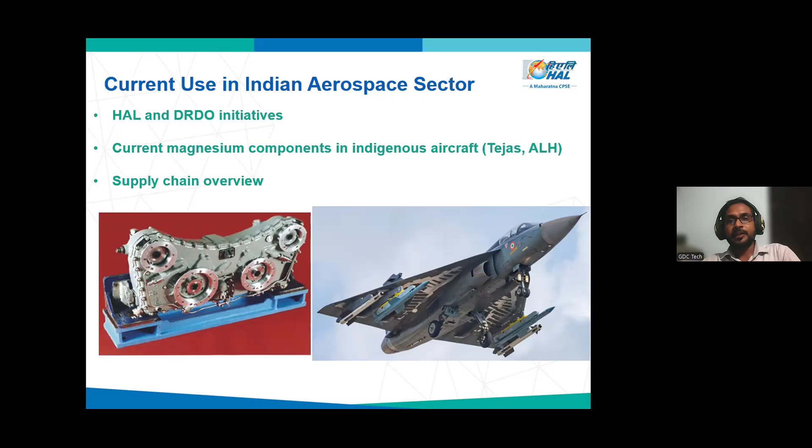Recent development in additive manufacturing with magnesium alloys is still in the experimental stage.

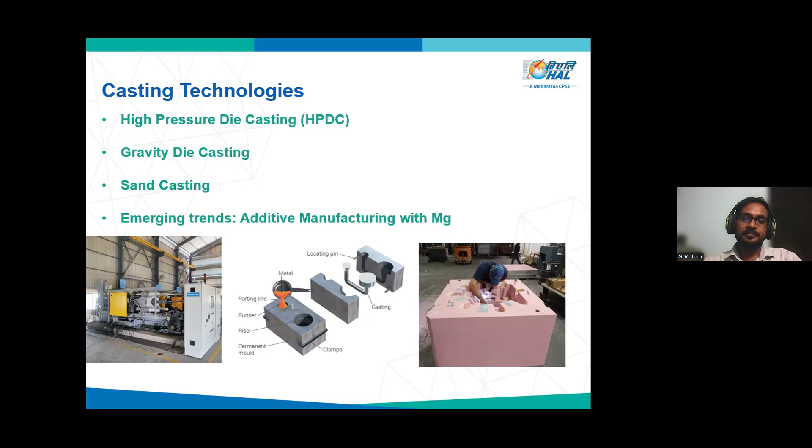Now, despite these advantages, magnesium does present some challenges. Let's talk about some of these points. First is corrosion. Corrosion is a key concern, especially in high humidity conditions and outdoor applications. Second, as I mentioned, India has a limited number of suppliers qualified to manufacture magnesium alloy castings. Third, magnesium is more expensive than aluminum. Even though the pure magnesium and aluminum rates are not very different, ultimately when we make alloys with rare earth and zirconium based hardeners, the cost of magnesium is far more than aluminum alloys.

And finally, the fire risk. Fire risk requires strict safety measures, as magnesium is highly inflammable in molten and powder form. These issues slow down adoption, but they are not impossible to tackle.

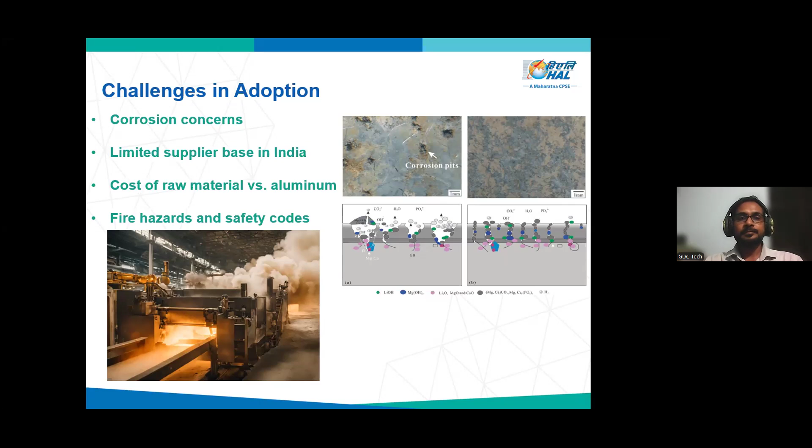So how do we tackle these hurdles? Recently, advanced surface coatings and chemical treatment help reduce corrosion risk significantly.

Localization of magnesium alloy is key. Developing our own alloy grade suitable to local conditions of India and industrial capability will reduce dependence on imports, and it will increase the adoption among the local players in India.

There is a need to heavily focus on skill development, training engineers and technicians in magnesium-specific processes critical for wider adoption. There are only a few handful of engineers and technicians in India who are capable of understanding the technical part of magnesium alloys, especially for sand casting.

Finally, global collaborations, especially with organizations like IMA, will help bring best practices and expertise and build a stronger ecosystem.

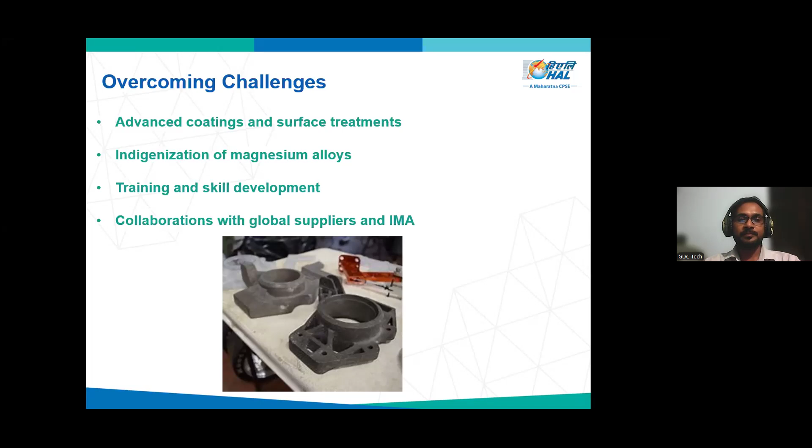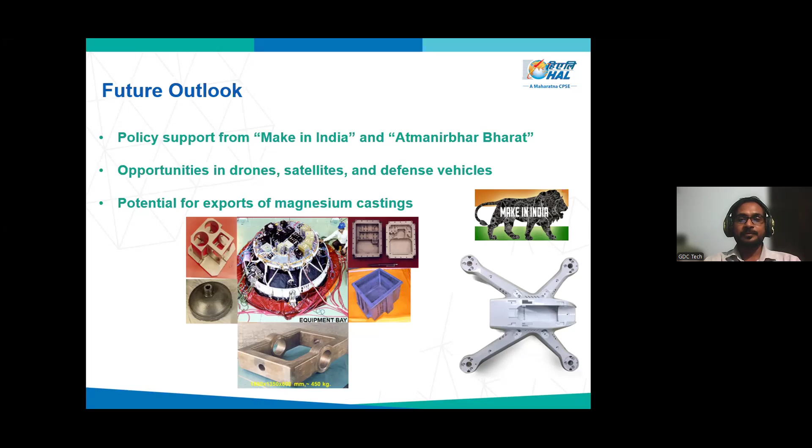So, finally, I would like to conclude with: magnesium castings are strategically important for India's aerospace and defense. The industries need to continue investing in research and development, strengthening the supply chain, and building industrial partnerships. This is not just about reducing weight, it's about building a competitive, self-reliant ecosystem.

I encourage all the stakeholders, industry, academia, and the government to work together in driving adoption of magnesium castings in aerospace. Thank you for your time today.